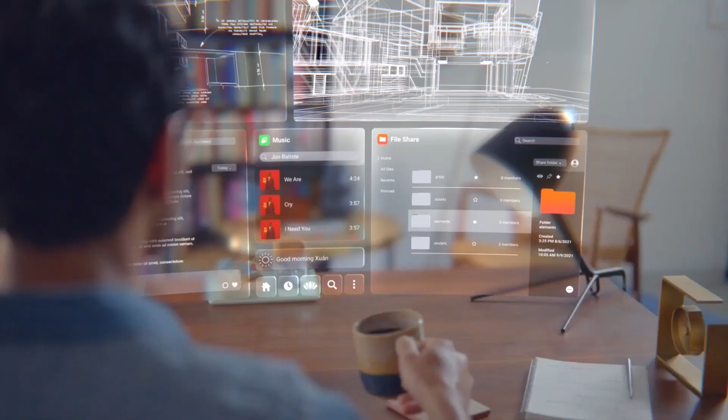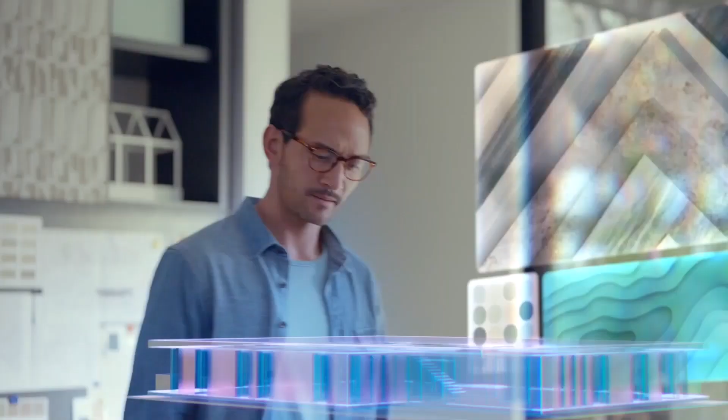Let's take a look at working in the metaverse. Could you imagine you can go to work without any commute? You will still have the sense of presence, share physical space, get interaction from anywhere. Digital twin is one of the building blocks to a fully functional metaverse. But how can we build one? Let's find out in this section.

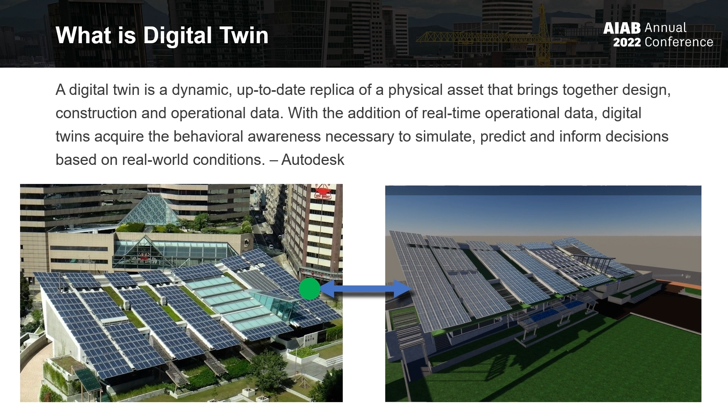A digital twin can be at any scale. It can be a component like an engine, an asset like a wind turbine, a process like a production line in a factory. It can be on a larger scale, like a building or a whole city.

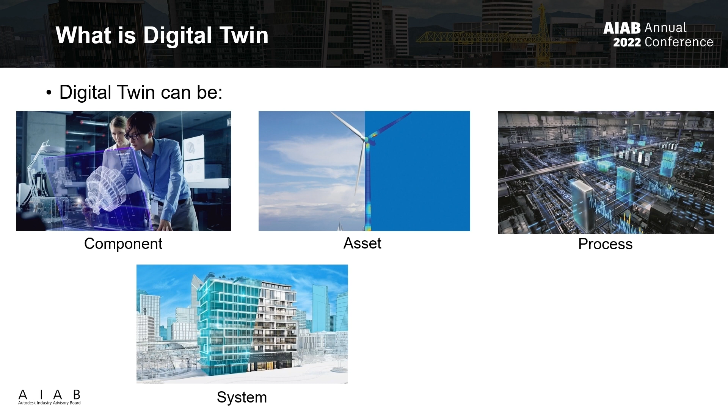To better describe and discuss the status of a digital twin among the industry, Arup has made up a framework to evaluate the current status of a digital twin. The framework contains 5 levels. Level 1 is the simple digital model. As the model evolves, feedback and prediction increase in importance. At higher levels, machine learning capability, domain generality, and scaling potential all come into play. By the highest level, the twin can reason and act autonomously and operates at a network scale.

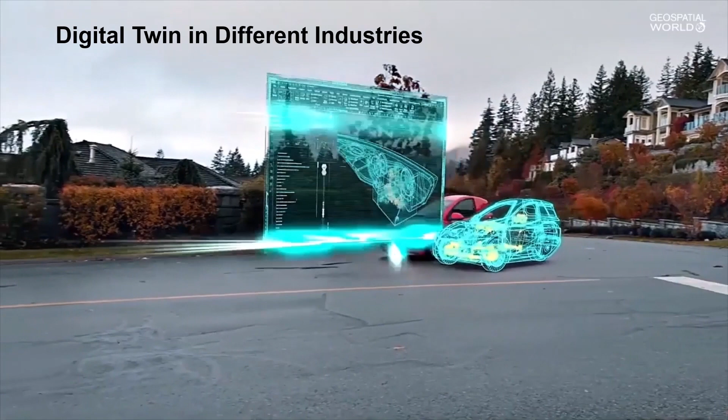After knowing what is digital twin, let's take a look at how other industries are using it. Some big banks and Fortune 500 companies have already created their platform for digital twin. For example, in the automotive industry, a new tire can be virtually modeled and tested for different weather conditions and optimized according to the final results. In supply chain, digital twins monitor and simulate events that impact the supply chain, for instance, a natural disaster or a trade dispute with a key country.

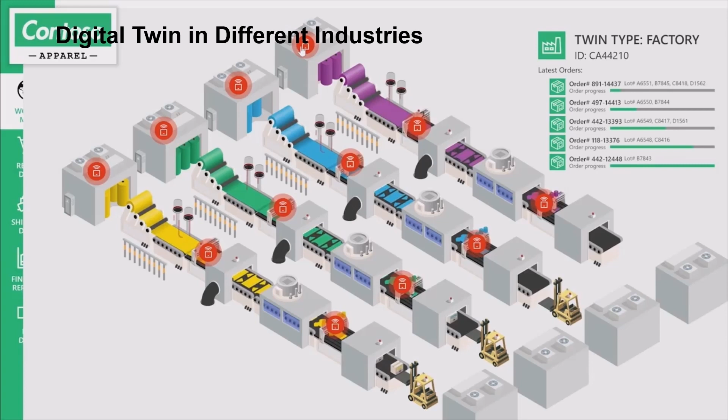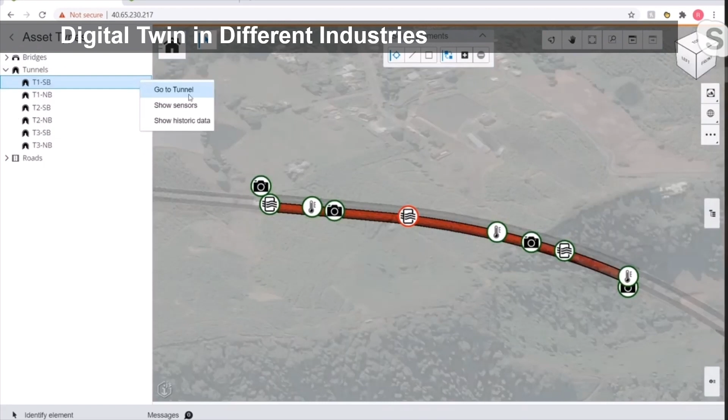Based on the results, companies can proactively react to the events. In the case of industrial companies, they can identify problems before they occur and predict future outcomes by simulating the production process in the factory. For the infrastructure sector, companies can capture temperature, CO2 level, and video from security cameras in the tunnel to see if any traffic jam or accident occurred.

Digital twin can also bring benefits to non-technical industries. One of the French supermarket chains created a digital twin of a store based on data from IoT-enabled shelves and sales systems. Now store managers can easily manage inventory and test the effectiveness of different store layouts.

As you can see, many industries have already utilized digital twin. But why? With digital twin, we can have a full view of all data, eliminate data silos, and unlock value across a project lifecycle, with all historical data and real-time data all in one place.

With all this data, we can integrate machine learning with digital twin to undergo different kinds of analysis. For example, we can gain a holistic view of the health and performance of equipment for predictive maintenance. Companies can immediately detect anomalies and deviations in their operation. Maintenance and replenishment of spare parts can be proactively planned to minimize time to service and avoid costly failures.

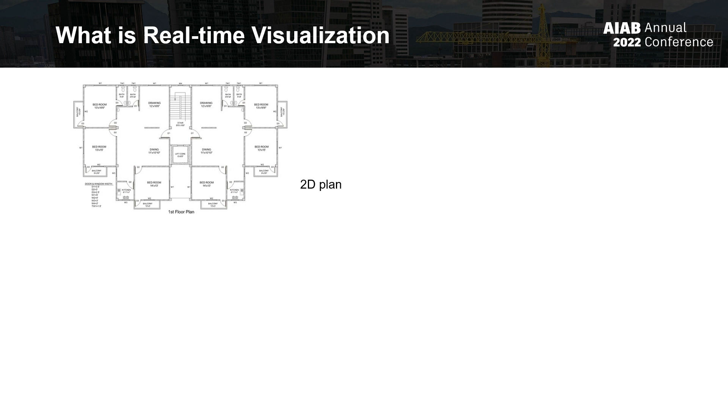Visualization is very important in our industry. I think no one can finish a project with just verbal, non-verbal, or written communication. So we use different forms of visualization methods to convey messages, like 2D plan, rendering, panorama, or video.

With visualization, we can identify flaws in the early stage to save lots of money and time, improve communications by clarifying the message, and produce super effective marketing materials and submissions. But do these kinds of visualization satisfy the needs for making a digital twin?

Not really. What we need is real-time visualization. Real-time visualization means the processing and publishing of any types of data as it changes in real time. For example, when the car is moving or the environment is changing in the scene, the reflection will change instantly. When using digital twin, the ability to visualize changes immediately is crucial.

For instance, when we are using IoT sensors to capture data of an engine, we can't wait for the applications to render the results. The delay will waste our real-time data. So that's why we need real-time visualization.

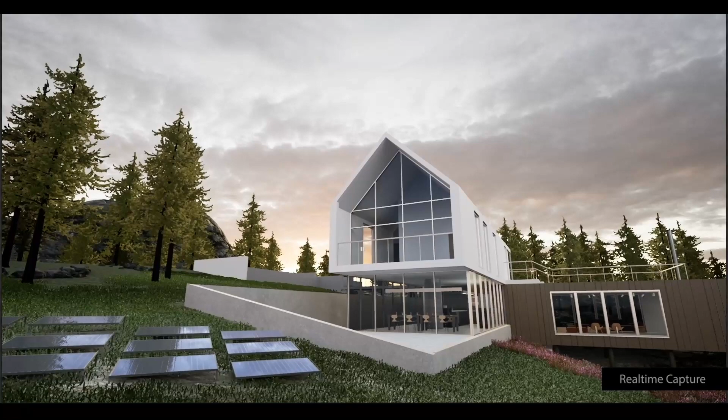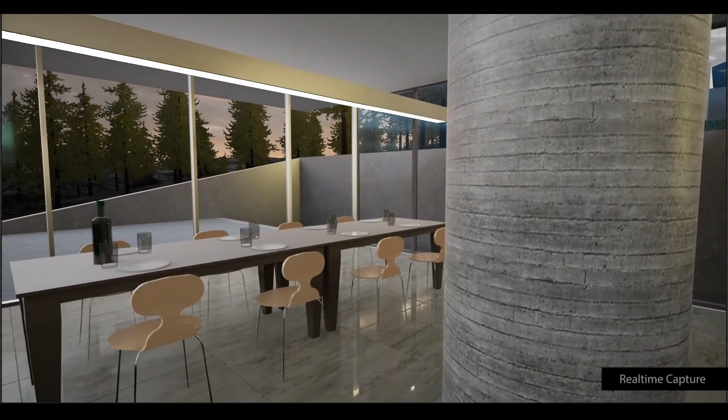Let's take a closer look at applying real-time visualization in our industry. Every Revit user should be familiar with this Revit model. Can you imagine it can become such a realistic and breathtaking scene? It isn't an animation, but a screen recording from a game engine with the user looking around.

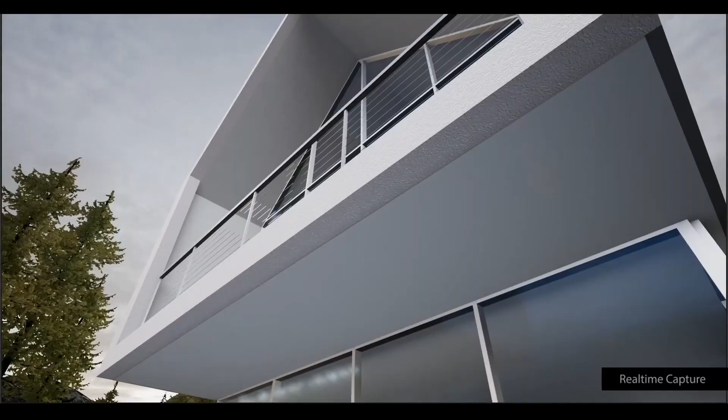Except the benefits of showing real-time data, which I have just mentioned. Real-time visualization can create a digital copy visually close to realistic.

So how can we integrate all these things? Let's find out. Digital twin can be achieved by collecting real-time data captured by IoT sensors and static data in BIM from the Common Data Environment (CDE), like ACC in Autodesk. Then use a management hub to manage the data and assets.

So how can we send the data? Or are there any tools to make our twin? Most of our static data is stored in Autodesk solutions. To utilize the data, you can use Forge. It's a set of cloud services that connects construction workflows with visualization, engineering, and design.

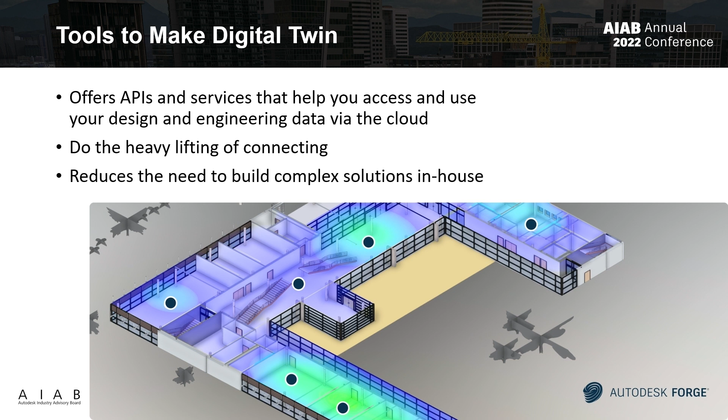The platform consists of Web Service Application Program Interfaces (APIs), which allow us not just to access the data, but to extend their usage. With Forge doing the heavy lifting of connecting, developers can reduce the need to build complex solutions in-house. Here is a showcase of applying digital twin in the zero-carbon building.

We can navigate inside the viewer, and with the Data Visualization API, users can interact with sprites and visualize real-time data, like temperature.

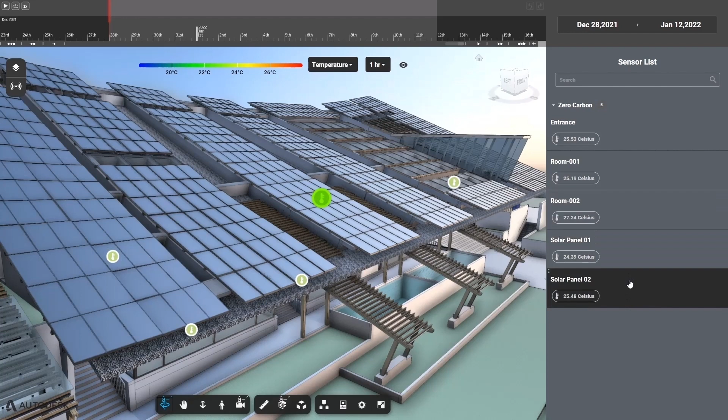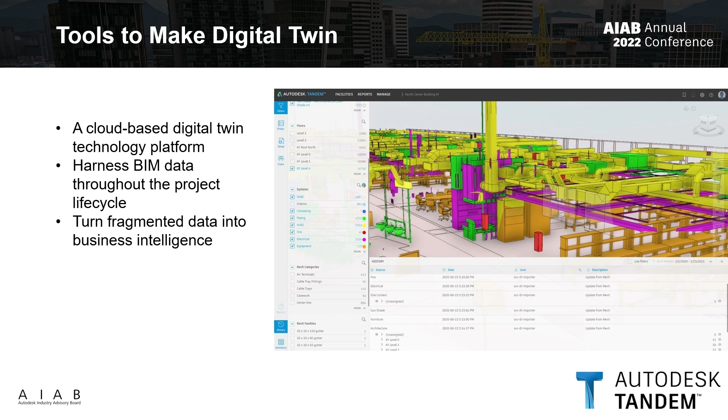Except for Forge, which requires the knowledge of coding, Autodesk Tandem is another great choice. It is a cloud-based platform that transforms the built asset lifecycle. It helps AEC firms harness BIM data throughout the project lifecycle to create and hand over a digital twin. It helps owners connect operational systems to the digital twin, turning fragmented data into business intelligence.

Game engines are another great tool to create digital twin. Let's see why and how we can utilize them. Using only a 2D screen to view the twin isn't the best choice. Vision, interaction, and spatial data are locked, so we can't fully enjoy the benefits of digital twin.

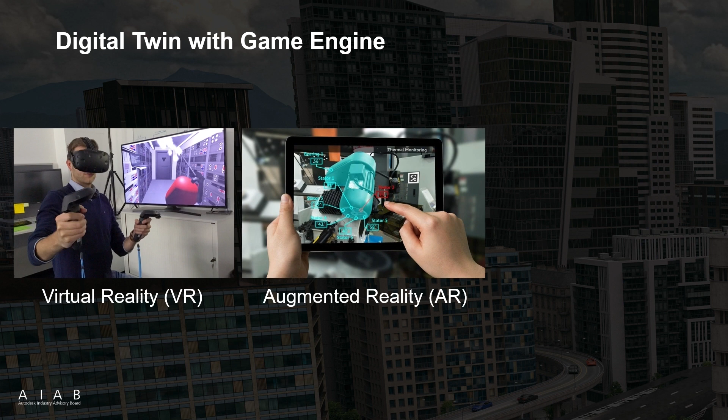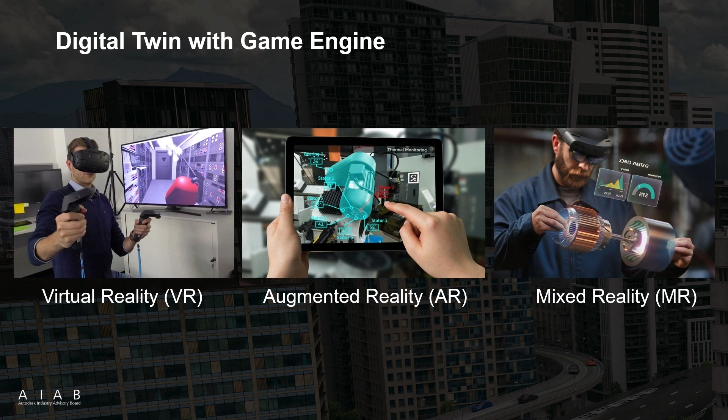To unlock its power, one of the great tools is by using XR. XR is the umbrella term for all immersive technology, including virtual reality, augmented reality, and mixed reality. All this technology blends the real world with the virtual world to create an immersive experience for the user.

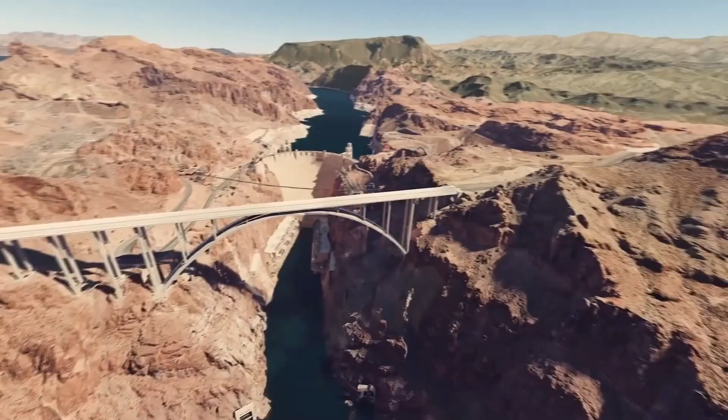Virtual reality is a computer-generated environment with scenes and objects that appear to be real, making the users feel they are immersed in their environment. For example, we can't travel around right now, but with Google Earth VR, we can get rid of quarantines or COVID-19 tests and go anywhere.

What if I want to see the real and virtual objects at the same time? So we need AR. AR is an overlay of digital content on the real-world environment. Imagine you want to buy a piece of furniture, like a chair. It can help you check how different chairs will look in your room, and pick the one that fits best.

Now you know the difference between VR and AR, it's time to take a look at MR. In mixed reality, you can see virtual objects just like you can in AR, but these objects can also interact with the real world. In a sense, MR is a more immersive and interactive type of AR.

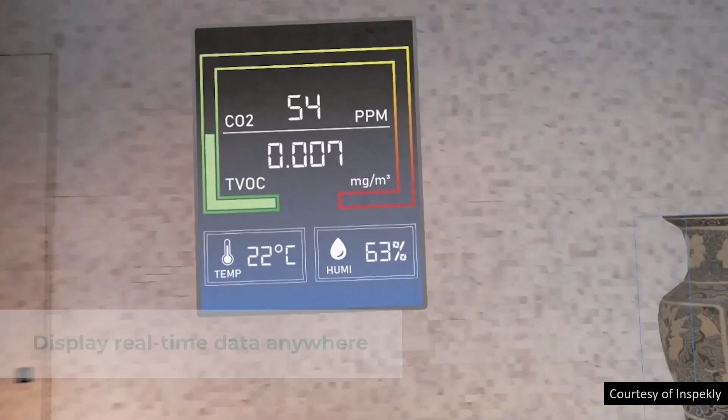Devices like HoloLens is one of the great options. It creates virtual content with a hologram and has translucent glasses that allow you to perfectly see your environment.

To apply XR into our application, we need a game engine. Game engine like Unity has many years of experience in creating interactive and immersive experiences. It can deploy our app into multi-platforms like Android, iOS, HoloLens, Oculus, HTC, to name a few. The entry points of Unity may not be suitable for every company due to the needs of development.

So is there any easy-to-use and off-the-shelf solution? Here comes Unity Reflect Review. With just a few clicks, you can view your Revit, Navisworks, SketchUp, Rhino model, or model in BIM 360, in real scale AR or VR.

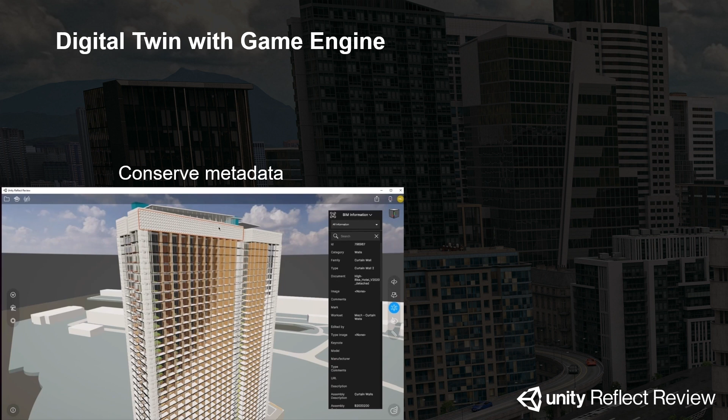Like here, we are using AR mode to view one of the Hong Kong existing construction sites for design review. Instead of just one model, you can view the BIM data. With just a click, you can view the data of the curtain wall.

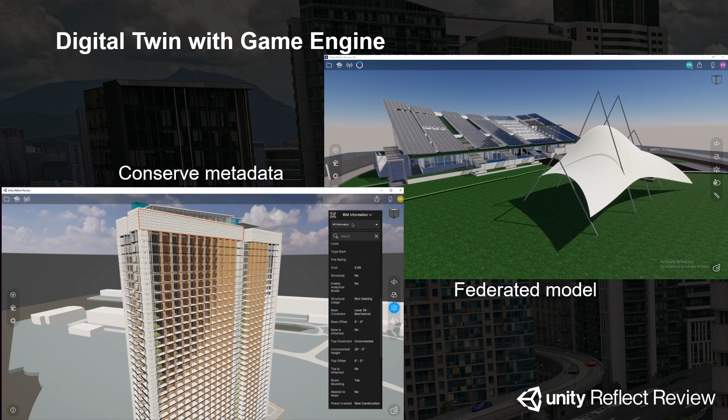Also, we can import multiple models to become a federated model. Like here, we have a model of the zero-carbon building, which is originally in Navisworks and optimized in Pixyz. The other is a massing model designed in Rhino.

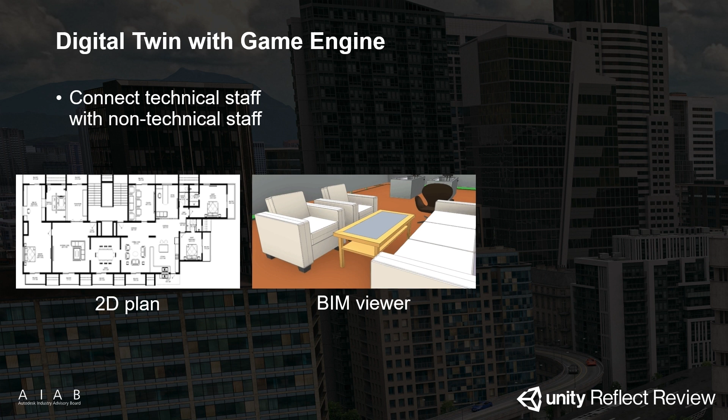This tool is extremely useful for communication, especially between technical staff and non-technical staff, as non-technical staff are normally not good at viewing 2D plans, navigating in a BIM viewer, or obtaining enough information from a printed mini model. The best way to visualize the design concept would be using XR.

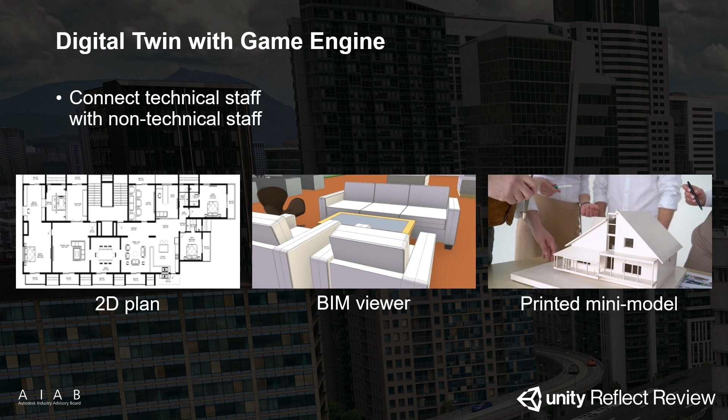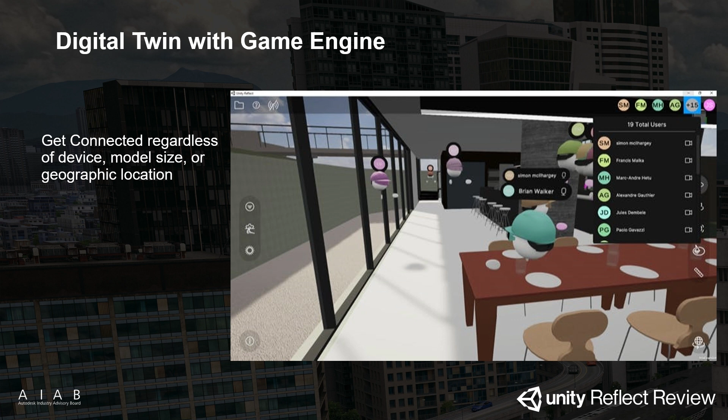Besides, Unity Reflect Review lets you collaborate with several people simultaneously and see them as avatars. The attendees can study and discuss the same virtual model of a machine or building with their PC, mobile devices, or VR headset. You can either be physically in the same room or attend remotely. You can think of it as design collaboration in the metaverse.

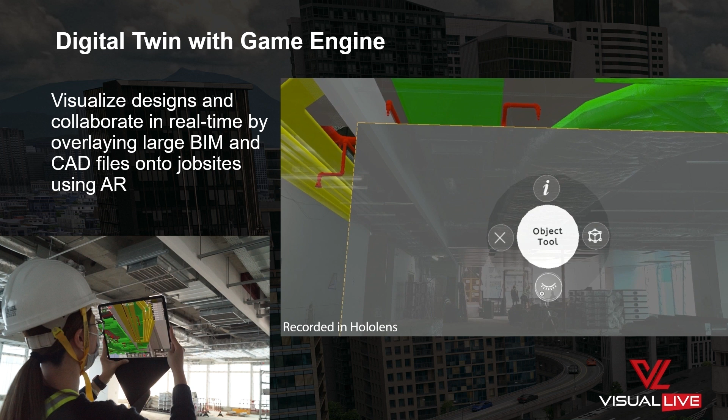Except for design review and collaboration, we can also enjoy the benefits of using interactive real-time 3D in the construction stage, thanks to VisualLive. Its main focus is to bring BIM or CAD to the job site by using AR or MR technology.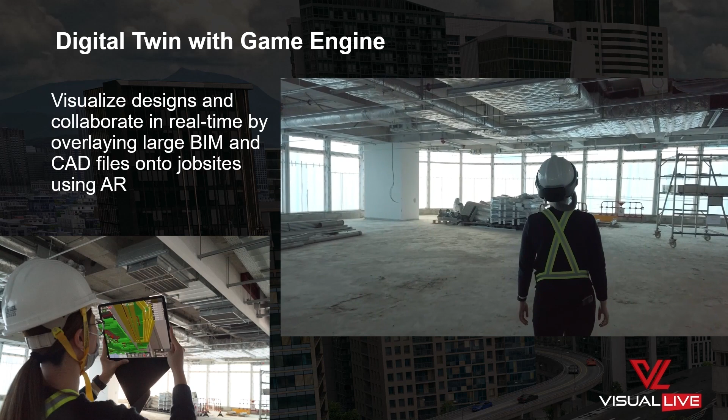With just mobile devices or HoloLens, you can simply overlay the virtual model onto reality by using QR codes or two points. That's me looking around to check the installation of MEP.

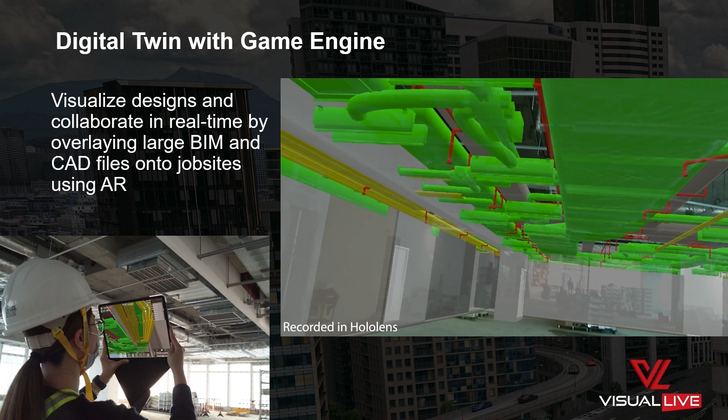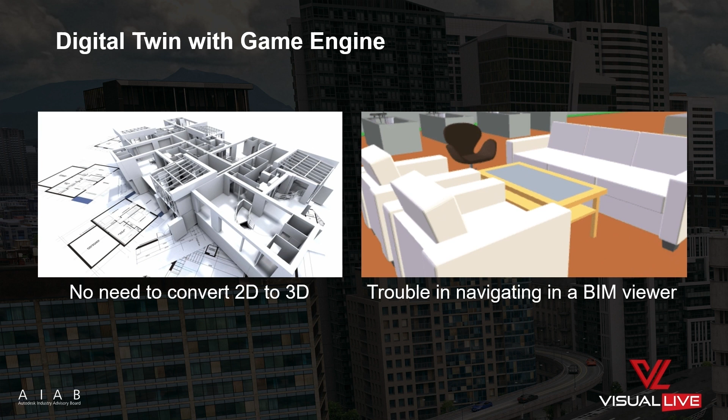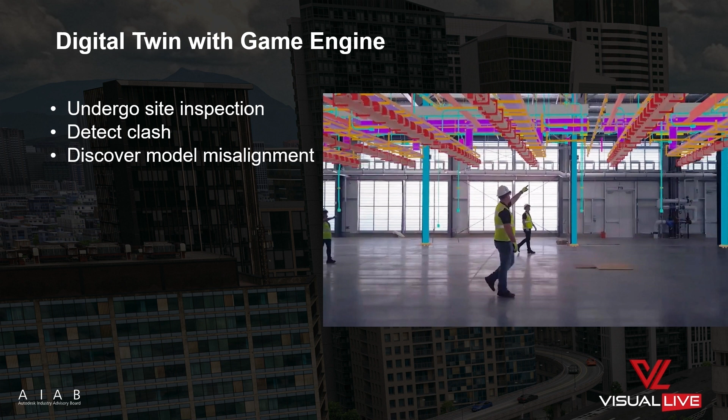This tool greatly reduces the time to convert a 2D plan to 3D, or to navigate inside a BIM viewer to get the right position. With the aid of interactive real-time 3D, it is now easier than before to undergo site inspection, clash detection, and discover model misalignment.

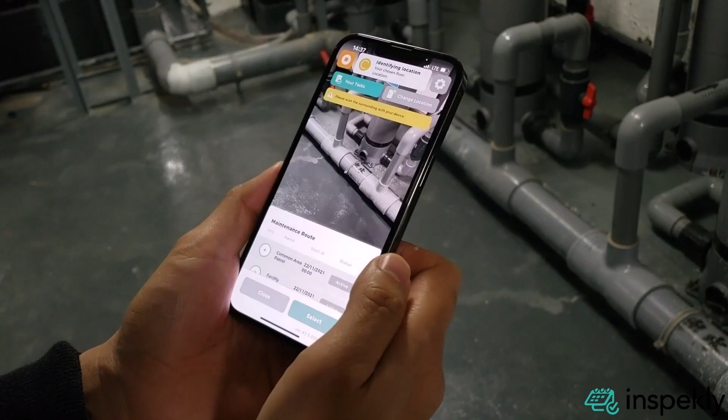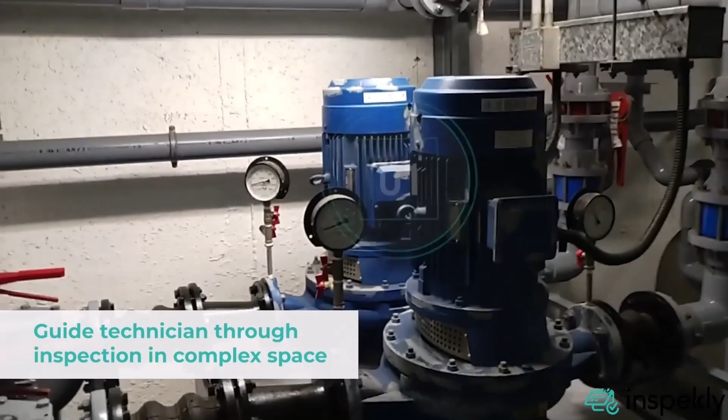At the end of the project lifecycle, that is the operation stage, we can achieve digital twin with Inspekly. It enables companies not only to transform paper-based inspections into digital checklists, but also to enjoy the advantage of interactive real-time 3D. It provides a guided tour, so frontline workers can easily inspect within complex spaces. With Inspekly, companies can collect real-time data generated by staff and monitor the status of buildings all over the world.

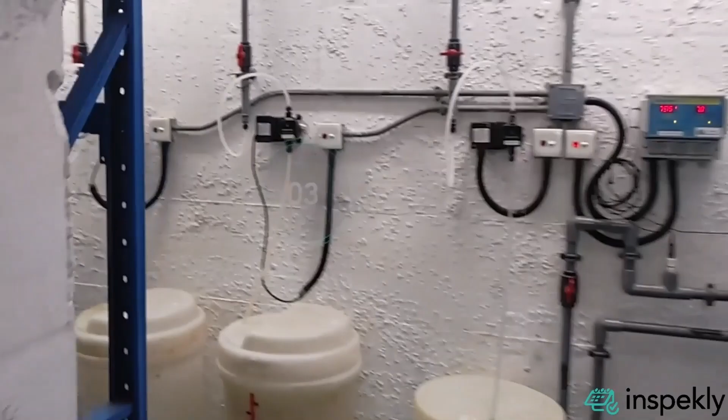All stakeholders have their expectations for digital twin. A platform that allows customization is needed. So Unity also builds a tool named Unity Reflect Develop to enable us to develop a digital twin platform based on a game engine. Like here, we have a Revit model.

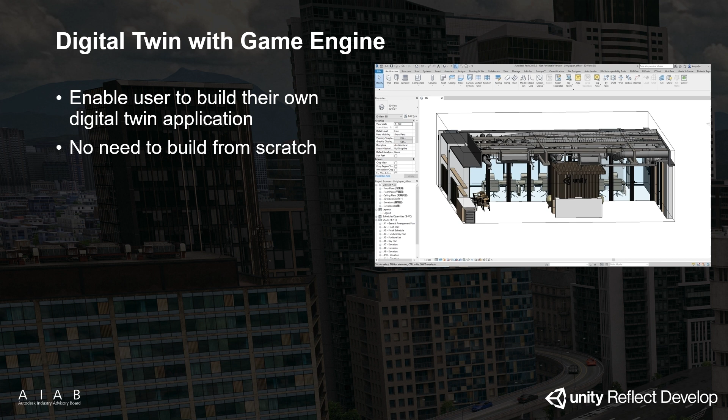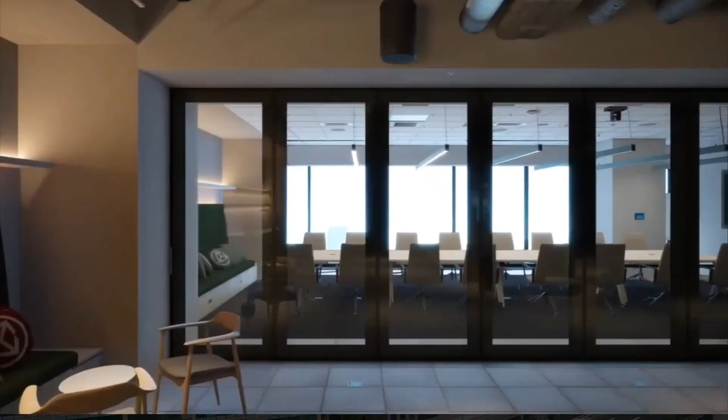We can then import it to Unity Pro, and with the aid of Unity Reflect Develop, we can customize our app. We can make an application like this. We can walk inside the office, change the environment settings, open the door automatically, and so on.

Sometimes the BIM or CAD models are not capable of loading into the hardware devices due to hardware limitation. So we can use Pixyz to customize and optimize your model. Pixyz can reduce the meshes of your model without affecting its shape.

Also, models that use the default material in modeling software are not stunning enough for making digital twin. Pixyz allows you to apply physical-based material and display it in your digital twin or even Unity Reflect Review.

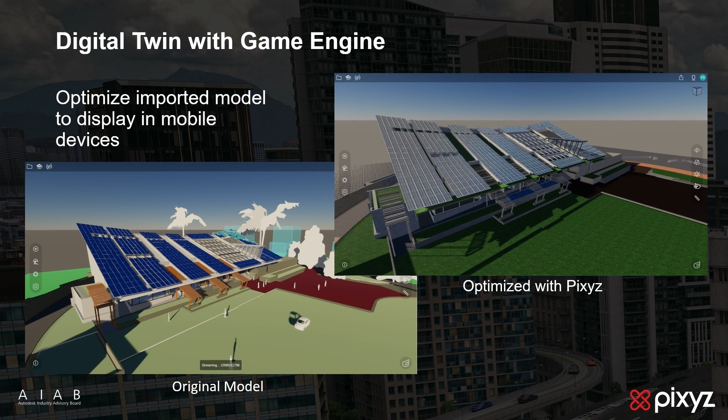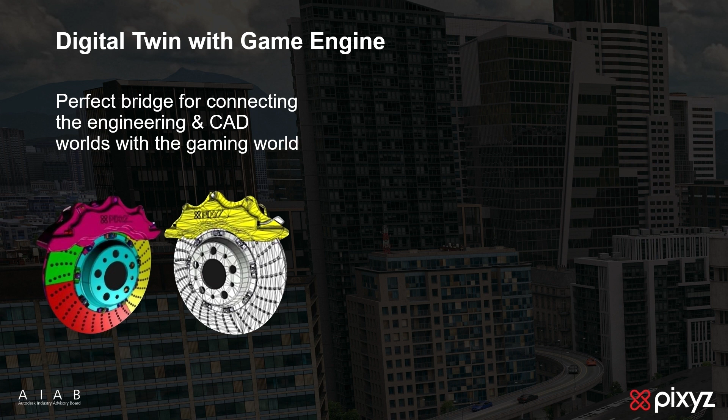Besides, in the gaming world, they only work with meshes. Pixyz allows us to convert CAD to mesh, so we can use our CAD model. You can also combine the material to reduce the loading cost.

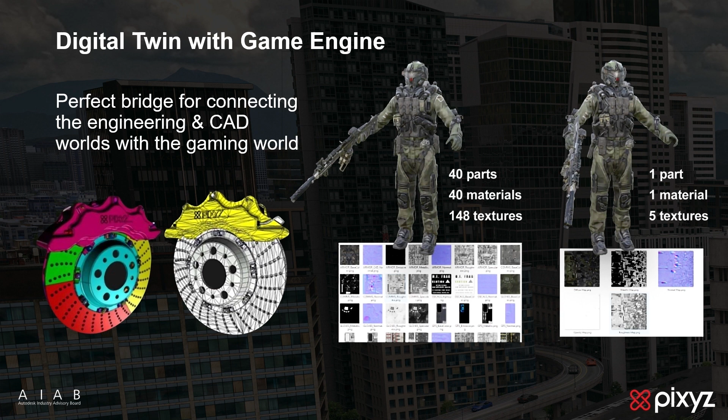Some people will be concerned about whether we need to know lots of coding to build a digital twin. With Prespective, you can create digital twin without coding. You can just simply drag and drop the assets, input the parameter in the panel to create a digital twin.

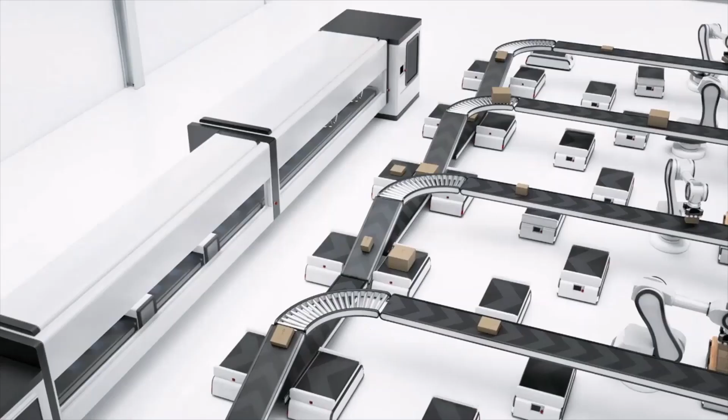This brings me to the end of the presentation. We touched upon the advantage of using digital twin, the basic concept of digital twin and real-time visualization, and how to build a digital twin.

This year, unfortunately, the conference is held remotely, which limits our interaction. Developing metaverse with the aid of digital twin, we can have a real virtual conference. I can't wait to see you all in the metaverse.